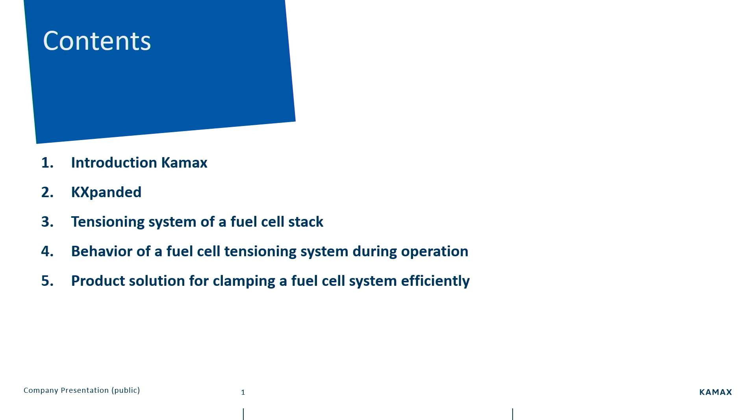My topics today will be a short introduction of who Kamax is, what our so-called KXpanded product is about. Then the tensioning system for fuel cells, the system that clamps down a fuel cell, the behavior of this tensioning system during operation and during assembly of the fuel cell, and what we do for the future to make these kinds of systems very efficient, one in manufacturing and two in the product function.

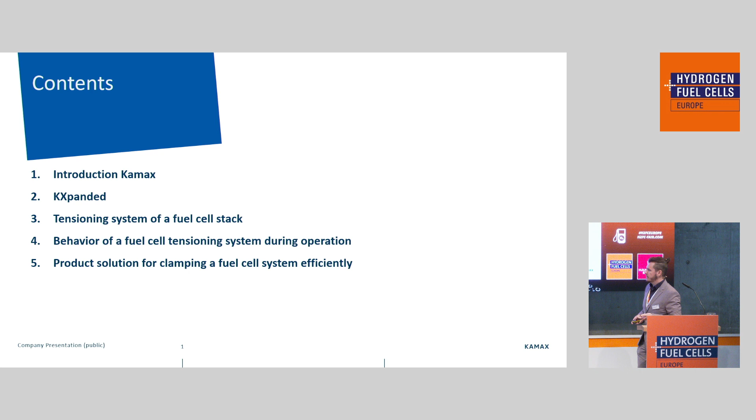First, let's talk a little bit about what Kamax even is. We are the mother company. Kamax, here in the middle at the top, is the company founded in 1935 in Osterode am Harz. We have historically made bolts, ultra high strength bolts, the strongest mass-produced bolts in the world, by the way. We have different departments in that company.

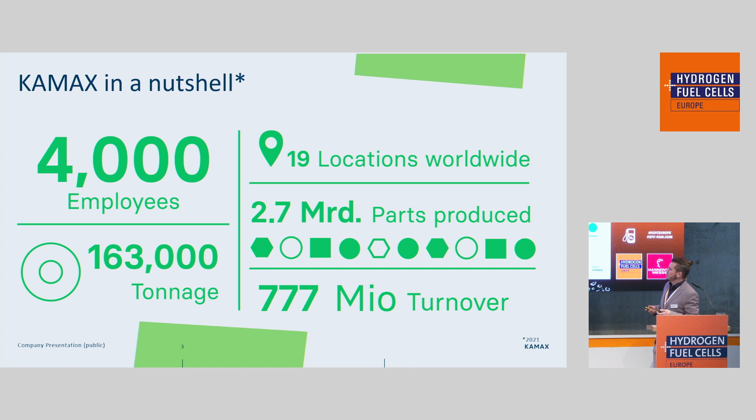For example, InnoHub, where I am located, a department for the diversification of Kamax. We have Nexenir, a digital company. We have Robert Schröder, a precision machining company, coating, a full service provider, and a joint venture as parts of our company. All centered around mechanical parts in general. And we have 4,000 employees at 19 locations worldwide, on basically every continent, and produce 2.7 billion parts, most of which are bolts.

Our product portfolio historically includes bolts, fasteners, assemblies. You can see here a park brake, for example, that is coming from Kamax, which is manufactured by different methods, precision machining and cold forming. You can see a warm forged, more complex part, and you can see, this is actually the shaft from an e-bike.

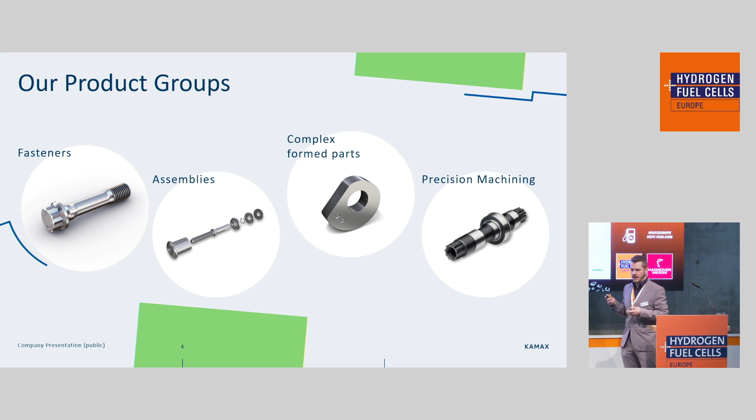One of the product groups we developed apart from that is our KXpanded bolt. And as you can see, this is a particularly long bolt. And what is so interesting about a long bolt? When you think about the manufacturing process of a long bolt, it tends to be bent. It tends to be not straight. And to manufacture a very, very straight long bolt is very difficult.

So what we did is we separated the head from the shaft, manufactured them separately from each other, and put them together afterwards. This allows the shaft, you see here in the lower picture in orange, to be particularly straight. And if you look at the product and go around all of the booths here, you will realize where this product might be located.

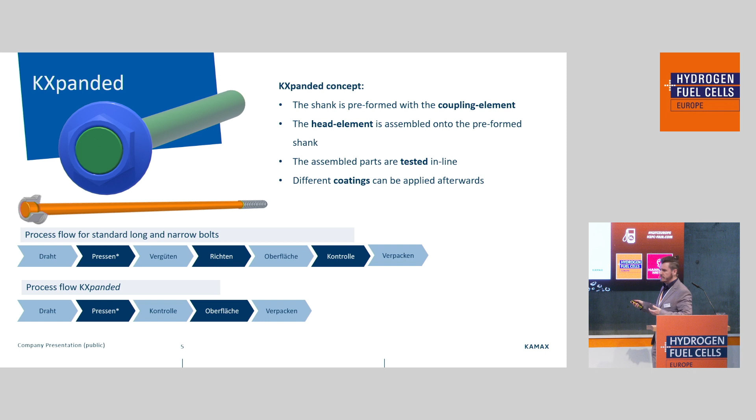We are able to have different kinds of heads on top, also heads with different kinds of functions we can put on this bolt. For example, attaching something to the head without an additional clip is possible. The assembled parts are tested in line, so each part that is produced is right away tested, and we have different functional coatings against corrosion, for example, but also against electrical conductivity, or with particularly high electrical conductivity if you want.

For example, these bolts can be used for fuel cells that have this kind of architecture, like shown on the left. You can see there the end plates at top and bottom. In between, a stack of bipolar plates and membranes. And our product is all around this fuel cell to clamp it down, basically.

Our bolts can clamp up to 600 millimeters, but we are also very variable in length. We can do different head sizes, different head geometries to optimize the force on the end plate, on the top. We can do small batches as well as large batches, so we are able to scale up because we have cold forming as our core technology, which is a very scalable technology and a very fast process as well.

And as I told you, the high standards concerning the straightness of the bolt allow for an easy assembly of this kind of system. Because if you think about how you assemble it, you have to put it from the top, and from the bottom you have to straightly fit to that hole on the bottom. So that's very efficient to do, and compared to conventional rods, you don't have to put a nut on two sides, but you can only put a nut on one side. Therefore, the assembly process is way more lean.

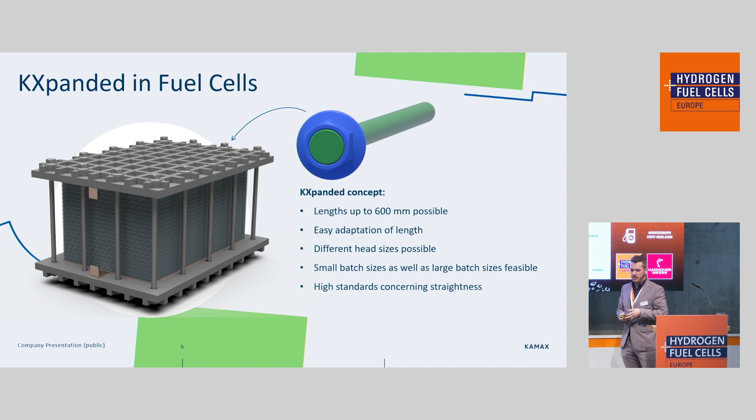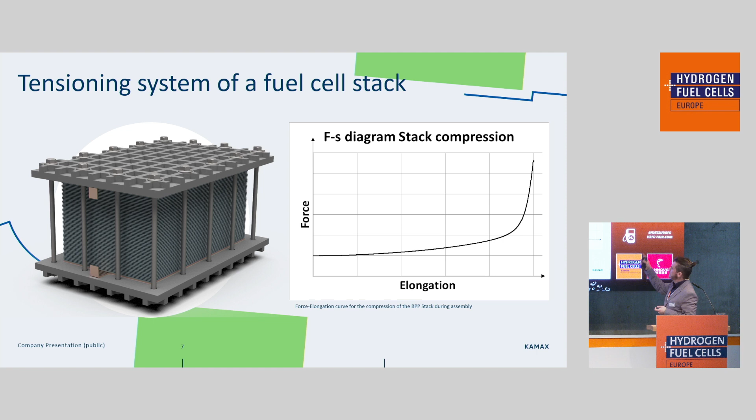From there, we started to get involved a little bit with how fuel cells even work. And we took a look at the force and elongation diagram from the fuel cell itself. And what we tried to figure out is, as you clamp down the fuel cell, how is the force generated? You can see it in this diagram. This is a real measurement, by the way, from our system. And we can also measure by the bolt itself, like during operation, for example. What we saw by that is that a regular bolt can easily supply these kind of forces. This is a really easy thing we can do with a bolt.

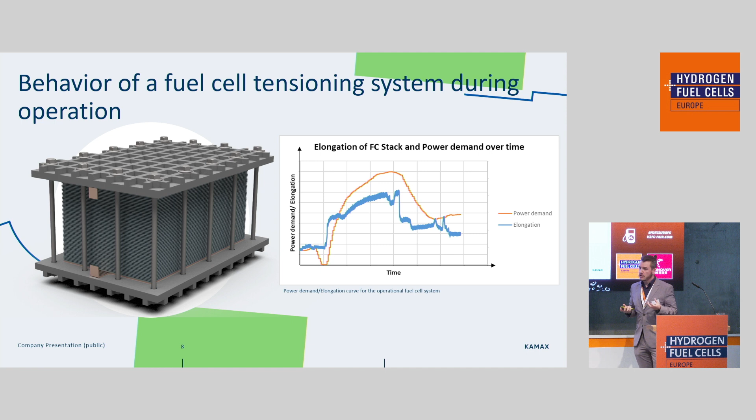We are able to compensate the internal pressure of the system. By internal pressure, I mean what I showed you earlier during the operation. We can compensate that by the clamping element itself. So it has a built-in function to compensate for exactly these real loads, these operational loads, while the complete system becomes less complex. Usually in these kind of systems, there are springs of some kind, like spiral springs or disc springs involved to compensate for that. We are totally eliminating these kind of components and integrating it into our bolt system.

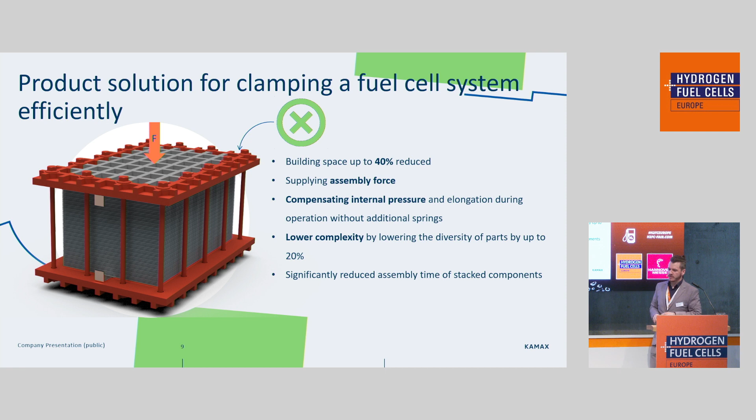Therefore, you have less complexity while assembling. You need a lower variety of parts for assembling your fuel cell. And therefore, we have significantly reduced time for the fuel cell assembly, as you have a lower amount of bolting places. Here you have many places where you have to set up the wrench and bolt it tight. In our system, this number of tightening points is reduced significantly.

So what we can do at Kamax now, developing from a bolt manufacturer to developing our product to be fit for hydrogen, we can now assist you with the architecture of your fuel cell tensioning system. We have gathered plenty of know-how, and I showed only a fraction of that. You can come to our booth, the Hessen booth, and there you can talk to our engineers in detail. We can consult you when it comes to the supply of components for your tensioning system. Almost every component which is part of your fuel cell tensioning system, we can supply it.

We can instrument, so sensorize your fuel cell by our bolting components to get you the best result for your tensioning system in the end. We have plenty of know-how from material and coating research. I have been a material engineer for 5 years myself, so I know what I'm talking about. At Kamax, we have functional coatings that are about blocking electricity or conducting electricity, are able to avoid corrosion, and are able to adjust the coefficient of friction. And we can act as a development partner for future generations of your fuel cell tensioning systems, if you want.